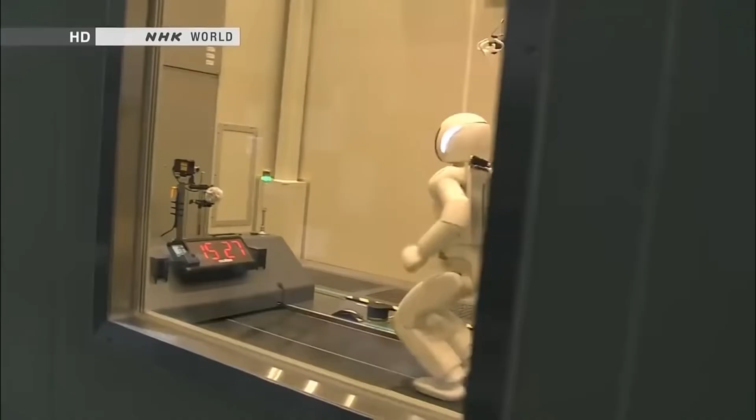Robot can walk and run. It can reach speeds of up to 9 kilometers an hour. For robots, walking is much easier than running. When running, both feet momentarily leave the ground. Balancing in midair is no easy task.

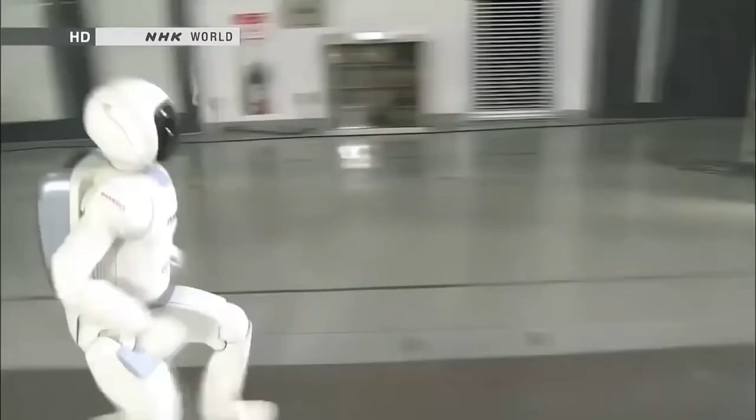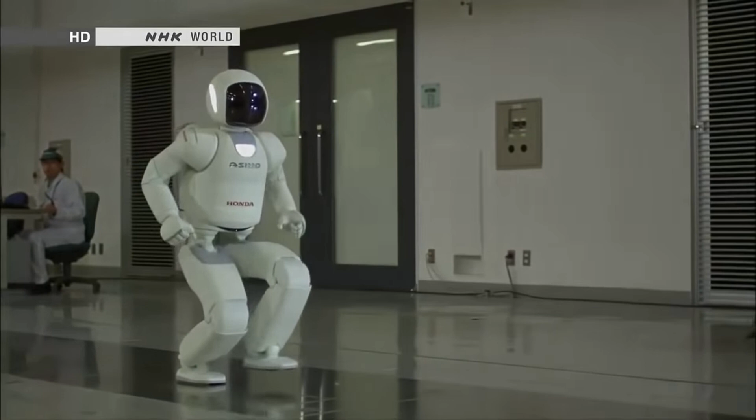From the video, you can see Asimo is really capable of all kinds of motions. It can walk and run, and it can even hop on one foot. But in 2018, Honda stopped the Asimo project. What was the problem?

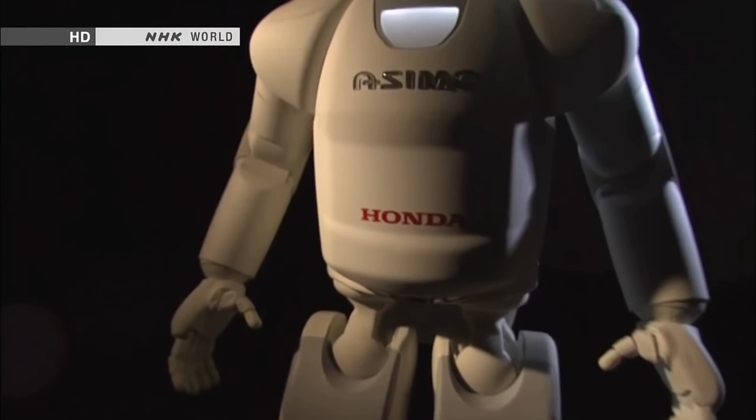The real challenge here is that all these videos show Asimo doing all the tasks and activities in a predefined environment. So it only works, let's say, inside the laboratory, or in an environment that has previously been checked and validated. So for example, the ground is all flat, and so on.

Then there's a big question from all the researchers: when or where can we apply this kind of robot? When the nuclear station had the accident in Japan, people were asking why we wouldn't send Asimo to the disaster to check what is happening there instead of risking human lives. The answer is clear. Asimo was not designed or tested in such conditions. It can't even work on uneven ground.

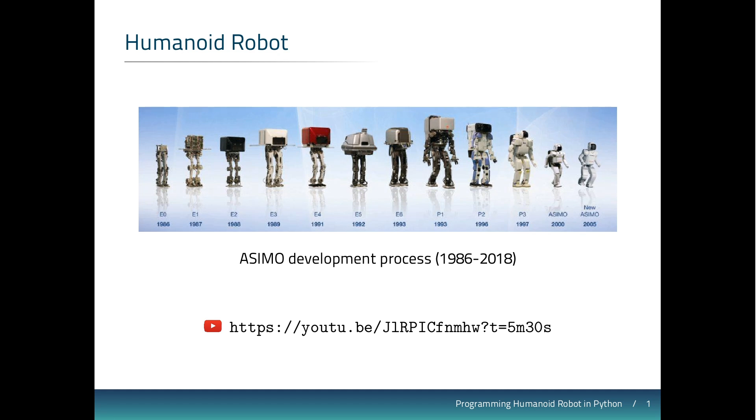After that, the USA organized a DARPA Robotics Challenge, which simulates the disaster environment, and the robot is supposed to finish 8 tasks. All these tasks are shown in the video.

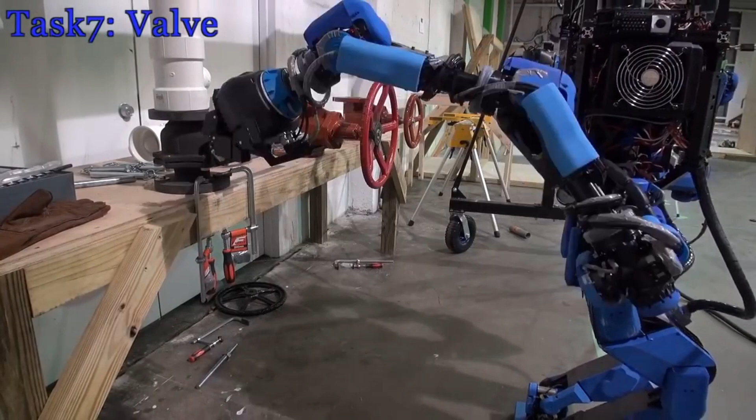Over the course of the 2 years of development, different teams came up with different designs, and let's look at the final day of the challenge.

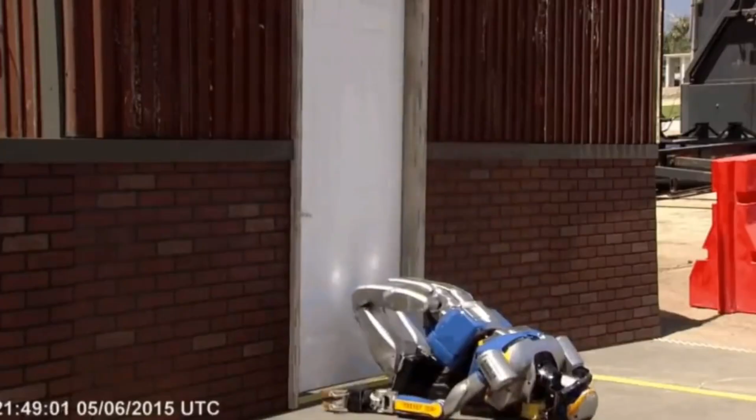The video clearly shows one big disadvantage of humanoid robots with legs: stability. Many robots had problems moving around on two legs. That's why some other teams came up with ideas to use 4 legs or wheels or some kind of combination.

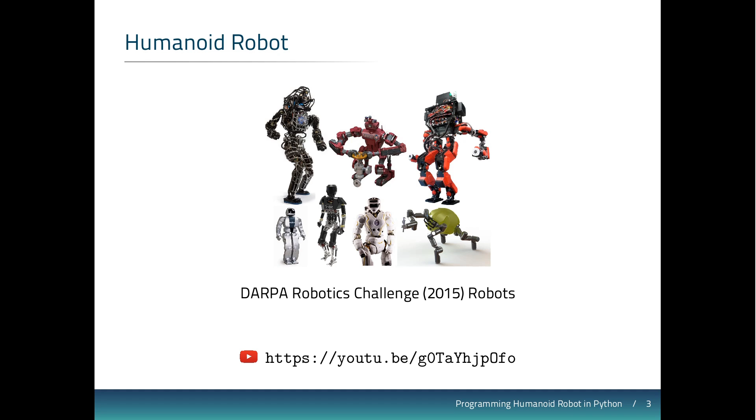Although in the DARPA challenge no team proved that they can cope with real disaster scenarios to save human lives, it did push research and development to a new stage.

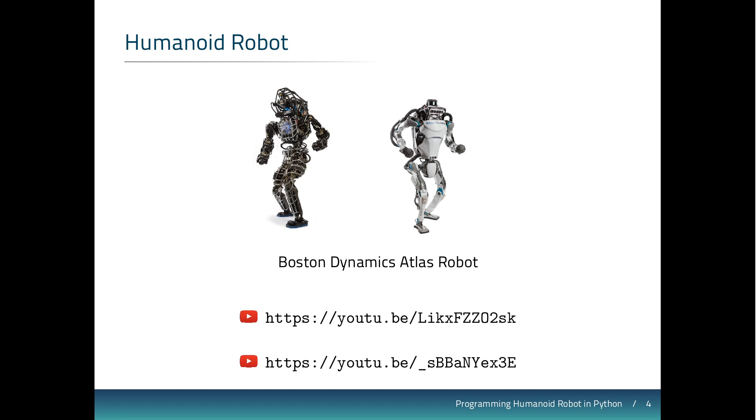This is a robot from Boston Dynamics. Maybe you already watched the video before. They are one of the companies which participated in the DARPA program. They provided robots to many teams in the challenge. After the competition, they further developed their robots. As you see, after 2 years, it has become quite capable now.

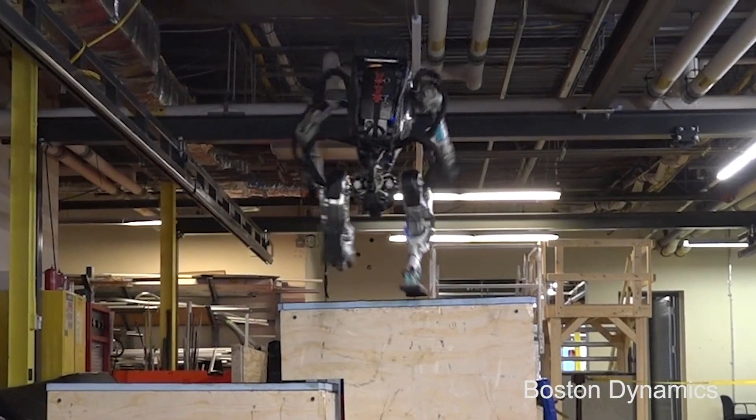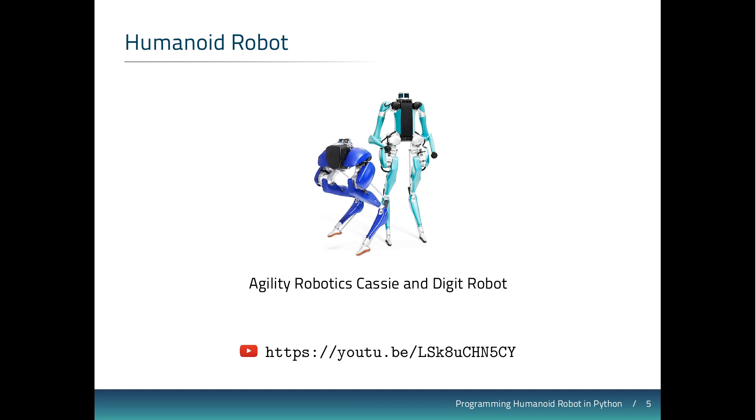There are also other robots that have really capable abilities, and we are looking for possible applications now.

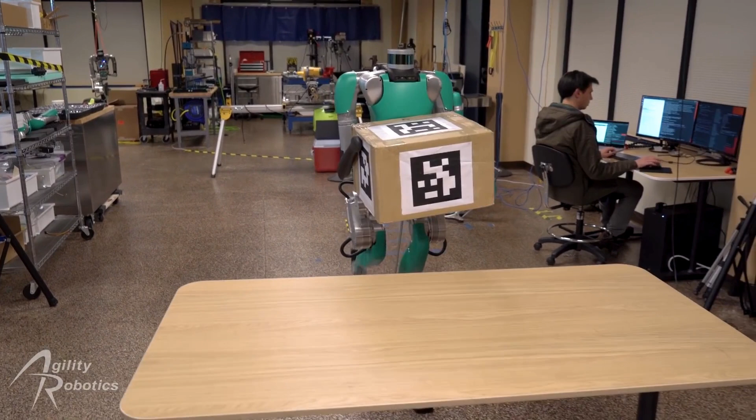After watching the videos of the most advanced humanoid robots, let's summarize what a humanoid robot is. First, humanoid robots must work in the environment for humans as it is. That's the big motivation. Instead of changing the environment for robots, we want to keep our environment for our convenience.

Second, the robot can use the tools that were designed for humans. Instead of redesigning or redeveloping all the tools for robots, why can't the robots use the tools that already exist? This is particularly useful in many scenarios such as a rescue environment, where you are supposed to use the tools as they are available.

Third, usually the robot has a human-like shape, because when the robot has a similar shape or morphology to humans, we are more relaxed with the machine. And that's also really important if we want to have robots in our daily life. We don't want to live with monsters.

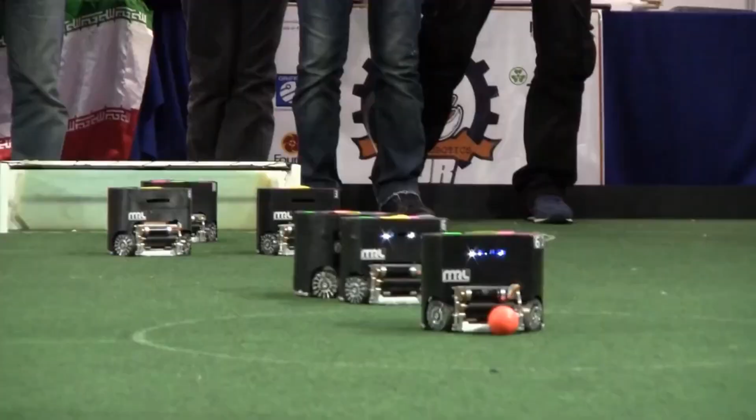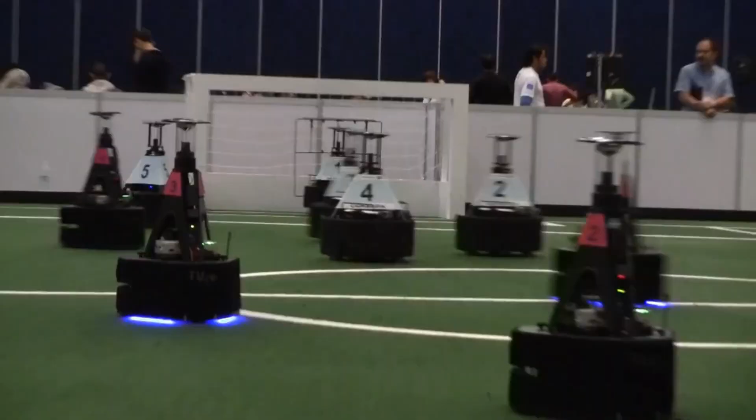So let's go see some soccer. This is RoboCup Soccer Simulation. It's virtual soccer inside of a computer. I know you don't care. You want to see robots. There's small size. There's middle size. But the best are the humanoid categories. There are 4 different categories of humanoid robots. The standard platform. In this category, everybody's using the same robot. NAO, he's really cute and he speaks French. Bonjour NAO.

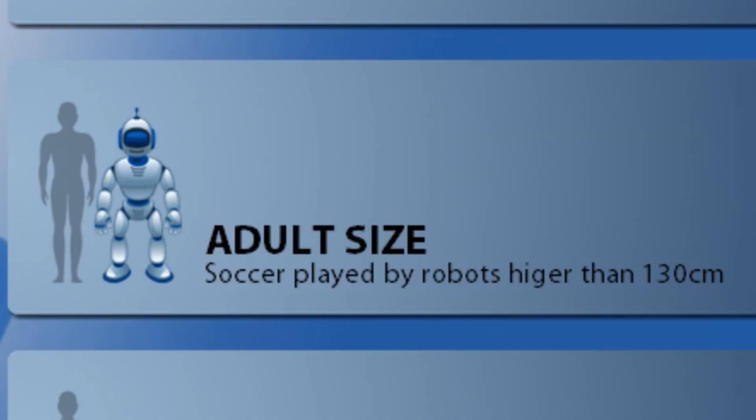The adult size. In this category, the robots have to be over 130 centimeters tall, and they don't really play soccer. It's just one kicker against one goalkeeper. Then they alternate.

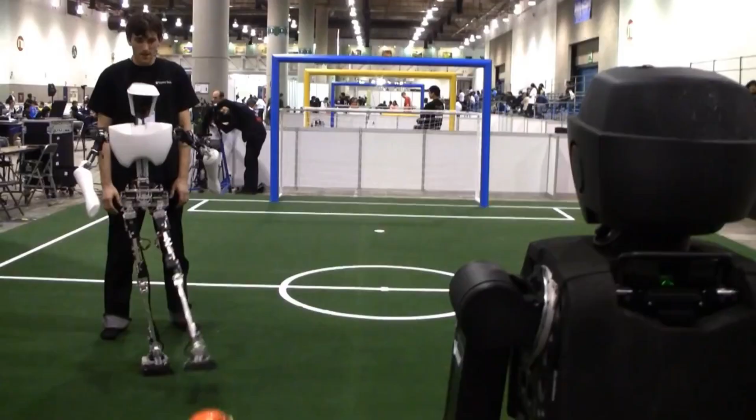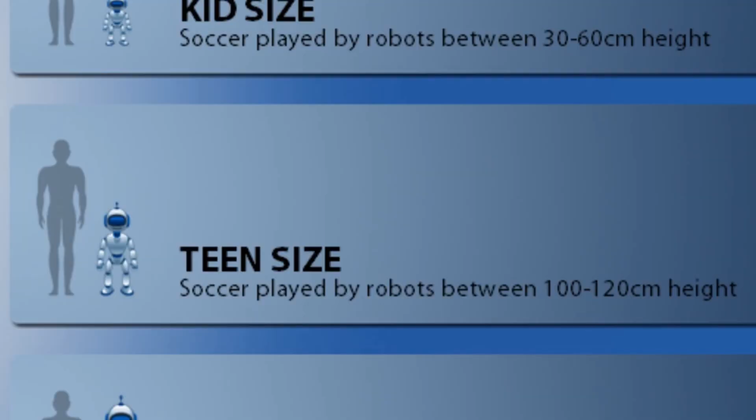Teen size. In this category, the robots have to be over 100 centimeters tall. I think this category will soon be the best, but for now, the best category is kid size.

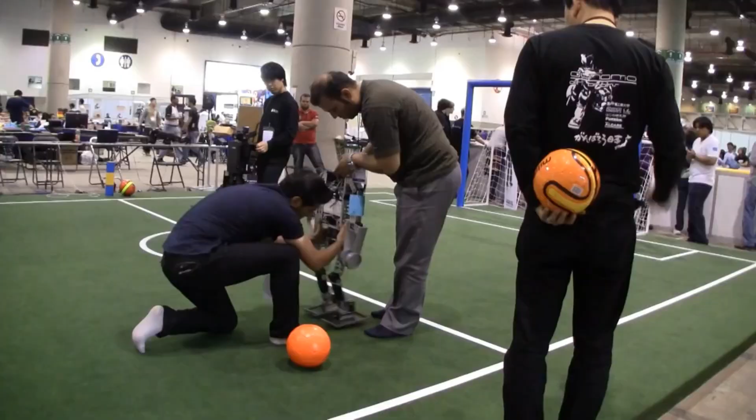Kid size. As you can see, these robots are super small, but they can kick, jump, stand up, throw balls, and plus, they're super cute. But be careful, this is the 2011 World Champion for the USA. And there's this one from Japan. Thank you. There's also these ones for Germany.

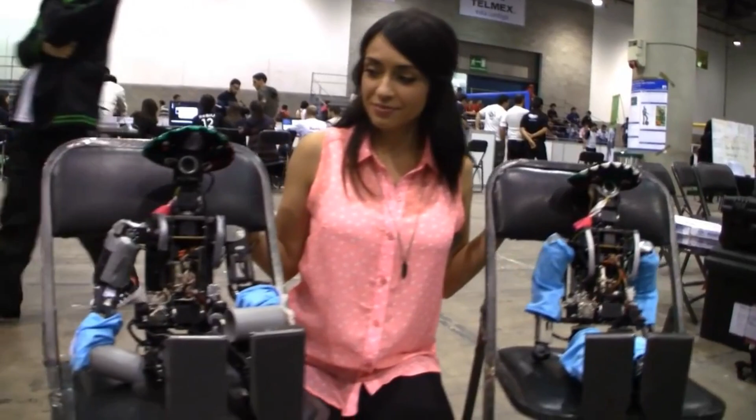What we have participated in is the RoboCup Standard Platform League. As you can see, in this league, all the teams use the standard platform, that is Nao, a humanoid robot. So all the teams develop their own software and compete with each other. Let's look at the video.

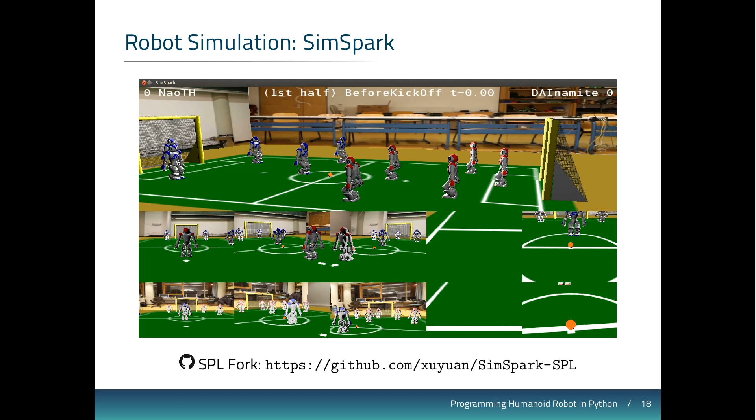This is our GitHub repo. Before you start, please make a fork of this repo from here. When it's ready, make a clone from your repo. You can get your repo URL here. Please also follow the instructions to set up the simulator and the development environment. If you have any questions, please ask in the discussion page.

After you set up everything correctly, you should be able to run the simulator. Here is the window of the simulator. It's a small window by default. You can use the mouse to move the camera around or use the keyboard to navigate around. In this window, I have my project repo cloned. You see all the files here.

To validate your successful installation, please go to the software installation folder, and then you can start the Spark agent, which will start a robot that connects to our simulator. And now the robot is connected to the simulator. As you see, it doesn't do anything, but it does do all the communication between our Python program and the simulator.